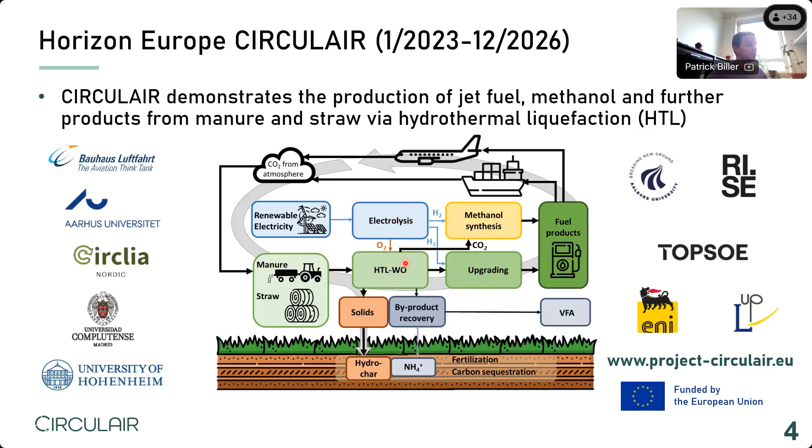This is where the wet oxidation process can use these 364 units of carbon, oxidize them, primarily producing heat, and also producing CO2 and some volatile fatty acids - this is all carbon-based. The concept involves utilizing the CO2 together with the CO2 from the HTL process to produce methanol. So the idea is a near-complete biomass utilization by using all of the side streams, and another aim is to increase this kerosene fraction to make jet fuel, with the ultimate goal of achieving carbon-negative jet fuel production by sequestering some of the solids underground and plugging all carbon losses so they are minimized.

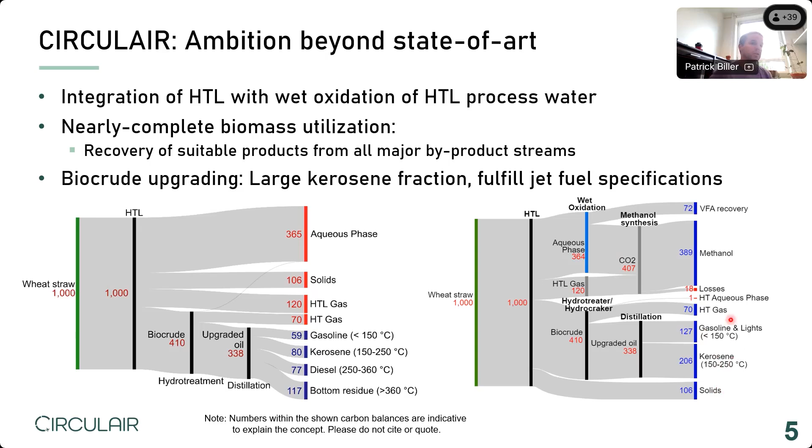So today's seminar is focused around the wet oxidation process. Briefly, this is a relatively old technology used for cleaning high COD wastewater, where the concept is essentially: you have a feed pump pumping your wastewater, combining it with compressed air, heating it up in a heat exchanger, and then the oxidation takes place between the organics and the oxidant.

This is an exothermic process, creating more heat. After the oxidation, it's cooled down, the pressure is released, and you separate your treated water from the off gas. Conceptually, you have your organics in the wastewater, and they are oxidized to CO2 and water.

Additionally, there is an intermediate product often formed, which is acetic acid, which can also be oxidized to CO2 and water, but it requires quite harsh conditions. So this is often found as an intermediate product. This is the wet oxidation process.

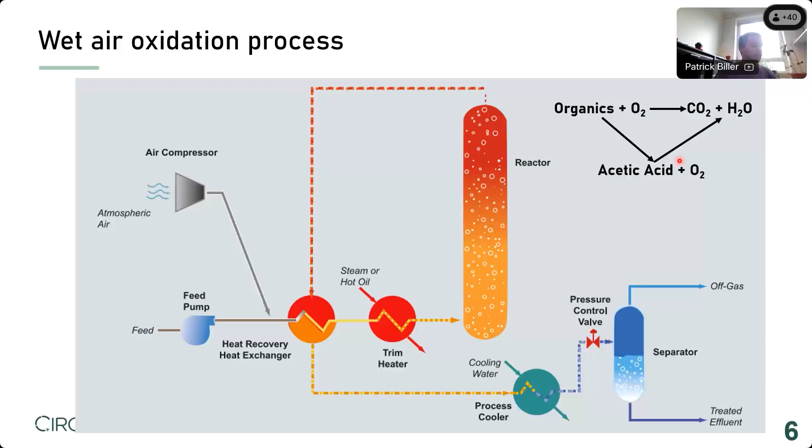And the idea of HTL wet oxidation integration, I'm going to try and explain here. It's all based on the fact that the wet oxidation process is exothermic and produces excess heat. The idea is that we can use this to provide the heat needed for the HTL.

On the left side of this diagram in green, you basically have a normal HTL process where you have a biomass slurry at ambient temperature. It's heated through a heat exchanger, which is heated by the HTL product, to around 280 degrees.

Then it would go into your HTL reactor, which we are operating at 325 degrees here. And then it'll be cooled down by heating the influent slurry. And then your HTL reaction is finished.

You would separate your biocrude oil, your CO2 gas, and your hydrochar in a separation here, leaving you with the dirty process water, very high in COD, which then goes into the wet oxidation process.

In the wet oxidation process, again, you have a heat exchanger to heat up your process water to around 280, 290. Then you add the oxidant, and this introduces this exothermic oxidation reaction, which will then increase the temperature of your process water to around 350.

This heat, this 350 degrees, can then be transferred by a heat exchanger between the wet oxidation side and the HTL side, meaning the HTL's 280 degrees can then be increased to the final HTL reaction temperature of 325. Typically you would have done this with a trim heater in a normal HTL reactor.

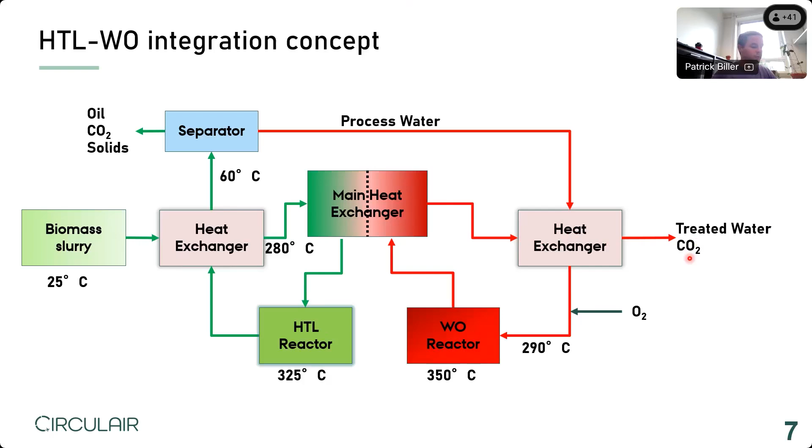First, we tried to model this process to see if it's theoretically possible to run autothermally, meaning providing all the heat for both processes from the exothermicity. First, we did a heat exchanger layout and a pinch point analysis to get an optimum heat exchanger network, shown here in this diagram.

Then we did an Aspen wet oxidation model to model the outlet wet oxidation and the amount of heat released from the oxidation of these organic compounds, based on the kinetics of known compounds found in literature. Finally, we did a MATLAB optimization code for the entire process integration, modeling all the temperatures at these different points in the diagram.

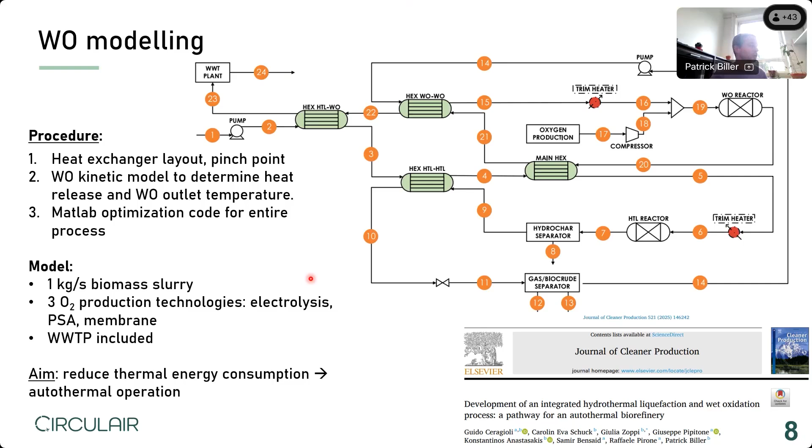The model assumed 1 kilogram per second biomass slurry input, so industrial scale. We used pure oxygen for this modeling, and included 3 different production technologies for oxygen: electrolysis, pressure swing adsorption, and membrane separation. We also included the energy required for treating the wastewater after either HTL standalone or HTL combined with wet oxidation. The aim was to find the optimal configuration to reduce overall energy consumption and achieve autothermal operation.

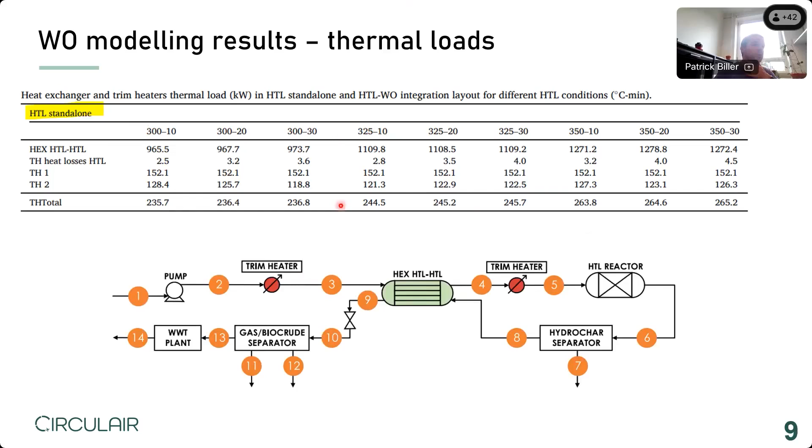So the modeling results: this here shows the HTL standalone system, where we modeled 3 different reaction temperatures and 3 different times—300, 325, and 350 degrees, with 10, 20, and 30 minutes of reaction time. You can see that the total energy consumption is between 230 and 260 kilowatts for this standalone system. Now I'm going to jump straight to the combined process.

Here we're performing HTL again at these different reaction temperatures and times, but the wet oxidation at 350. What you can see is that the trim heaters usually used to bring your reactants up to the reaction temperature in the wet oxidation reactor have an energy consumption of 0, meaning they are not needed at all. So all these top 4 lines are all heat exchangers—these duties, these kilowatts here, they're for free.

There's no electrical heat provided. The only heat we need to provide is for heat losses of the HTL reactor itself. So the total energy consumption drops from 235 kilowatts to around 2 kilowatts for heating only. This shows that autothermal operation is possible for the majority of combinations of HTL and wet oxidation, but not if HTL is run at the same temperature as wet oxidation, namely 350 degrees, because then there's no temperature difference to transfer the heat needed for the HTL reaction.

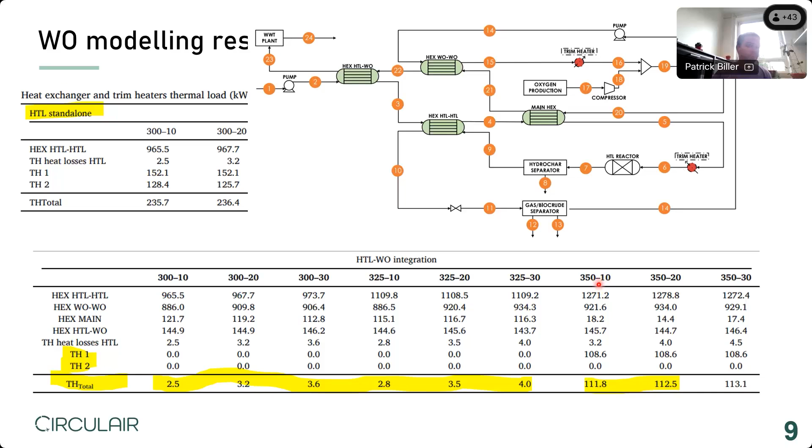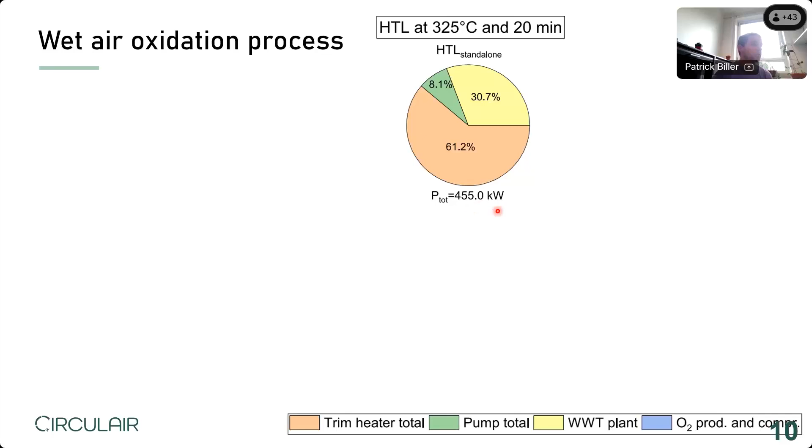The combined ones, you have 3 cakes because there are 3 different oxygen production technologies: pressure swing adsorption, electrolysis, and membrane separation to produce the oxygen. You can now see that the total energy consumption is around half. And now the majority of the cake is made up of this blue one, which is actually the energy consumption for the oxygen production and the oxygen compression. But the overall energy consumption is around half of that from the standalone process. So you can see that the oxygen production takes a lot of energy.

So you might think, why not just use air? And that is a very valid question.

On these different blue bars, for pressure swing adsorption, 15% of this blue area is for compression and the rest for production. These vary a little between the different production technologies. For example, electrolysis is quite energy intensive, so only 5% of this would be for compression and the rest for production, also because it comes out of the electrolyzer at elevated pressure. If you would use air, it would use about 65 kilowatts versus the 85 kilowatts used in pressure swing adsorption, so about a 20% reduction in this blue area. That is entirely a possibility worth thinking about, and we'll get to that in a minute.

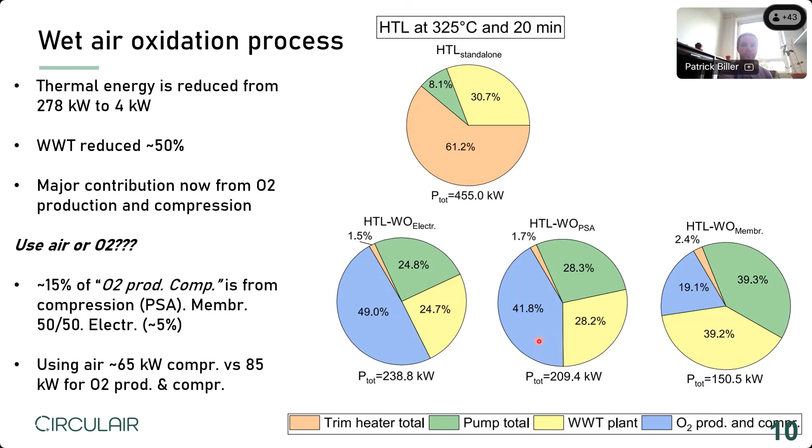But first, another energy comparison of these integrated and non-integrated processes is something called the energy return on investment. Here we compare the energy produced, which is the mass flow of biocrude times the heating value of the biocrude, to the energy needed for pumping, heating, and wastewater treatment. That gives you a ratio of how much energy is produced compared to how much is consumed in the process. The green ones here are for HTL standalone, meaning you produce around 3 units of energy for every unit of energy invested in running the process. So that is fairly okay.

And if we look at the energy return on investment of the combined process, you can see that we have to add the oxygen production and compression costs to this, as well as additional pumping for the wet oxidation process. But regardless, you can see the numbers increase quite significantly compared to the standalone, because we've saved so much on the heating despite the additional energy for compression and oxygen production. You can also see that it makes a huge difference which oxygen production technology we use.

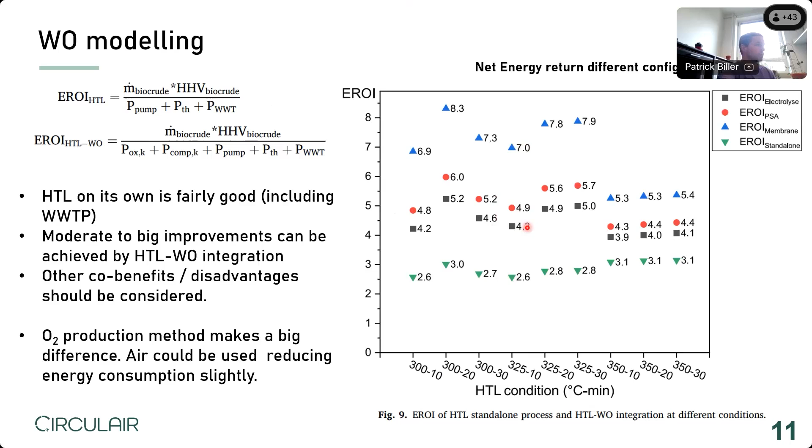And again, you could ask, should we be using air versus oxygen? This is something I'm going to talk about in the next couple of slides. We did an additional study on a continuous system where we tried to mimic pure oxygen by providing hydrogen peroxide, which then decomposes to oxygen and water, simulating pure oxygen addition.

You have to consider that air is a lot of nitrogen, so when you're compressing it, you have to compress a much larger volume compared to pure oxygen. This is the disadvantage for sure, but you don't have the production cost disadvantage of pure oxygen.

And then there's also the question of the solubility of nitrogen. Basically, oxygen and CO2 solubility at wet oxidation conditions are complex, but quite high, almost complete compared to nitrogen, which will make a separate gas phase on top of your water phase or mix in between your water phase. This can mean that the equilibrium between vapor and liquid will change, meaning more water will evaporate, which will consume energy, lowering the heat release of your system. So there, the nitrogen is a big disadvantage.

An advantage of using pure oxygen is that you actually have slightly higher COD removal than using the air equivalent, as you can see in this figure where we tested air versus H2O2.

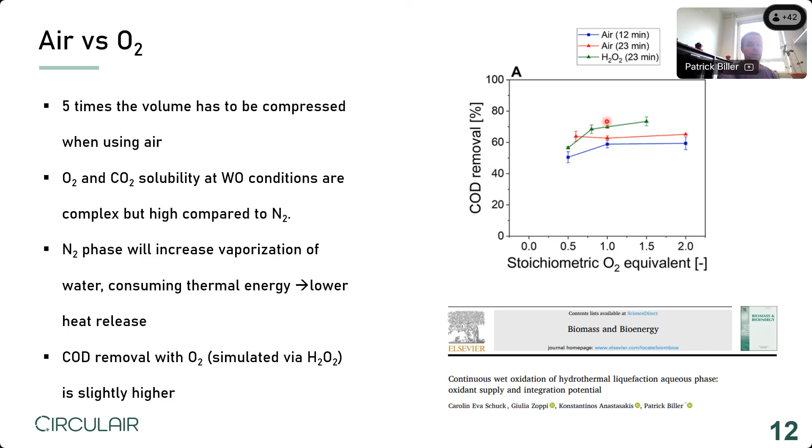In terms of the other experimental parameters that are important, for nitrogen, we aim to recover it as ammonium after the wet oxidation process. These first two figures show results with air, and the final one with hydrogen peroxide simulating oxygen. You can see that the blue ammonium selectivity in the residual nitrogen drops from 80 to around 60%, meaning oxygen is disadvantageous for this.

We don't know quite why.

Another interesting result is the recovery of acetic acid in the post-wet oxidation water, and here we don't see a difference between air and hydrogen peroxide.

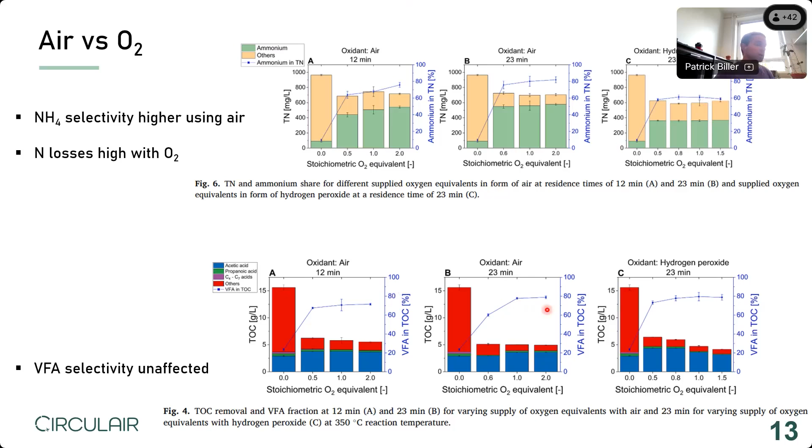Going back to this diagram of CO2 recovery - since we're producing a lot of CO2, sequestration could be quite interesting to evaluate. We know that the HTL gas is around 95% CO2.

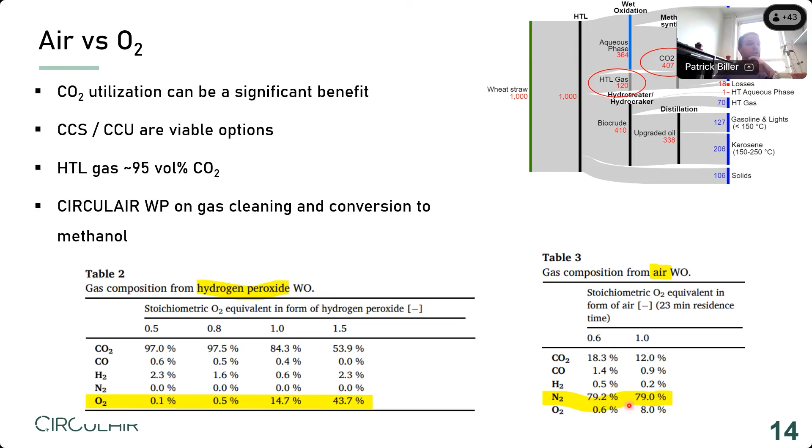These two tables compare hydrogen peroxide simulating oxygen versus air. If we provide substoichiometric amounts of oxygen, we end up with 97% CO2 and hardly any unconsumed oxygen. If we do the same with air, we end up with only 18% CO2 and a lot of nitrogen from the air, so pure oxygen is advantageous.

To summarize the experimental results: COD removal is a function of time and temperature, typically reaching around 80% under realistic process conditions. Ammonium is also converted quite efficiently, reaching about 80% selectivity, and VFA is also around 80% selectivity with high acetic acid. If we run substoichiometric oxygen supply, we can reach 97% CO2.

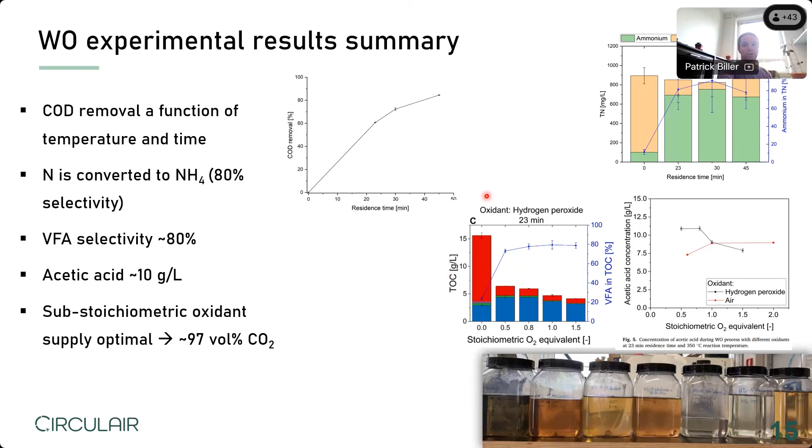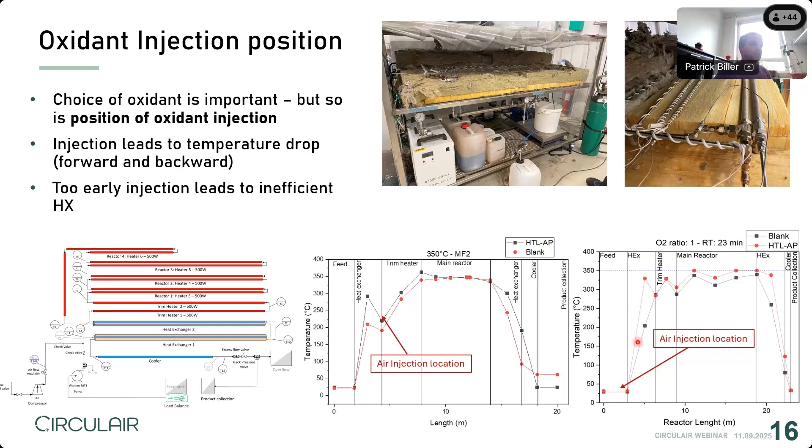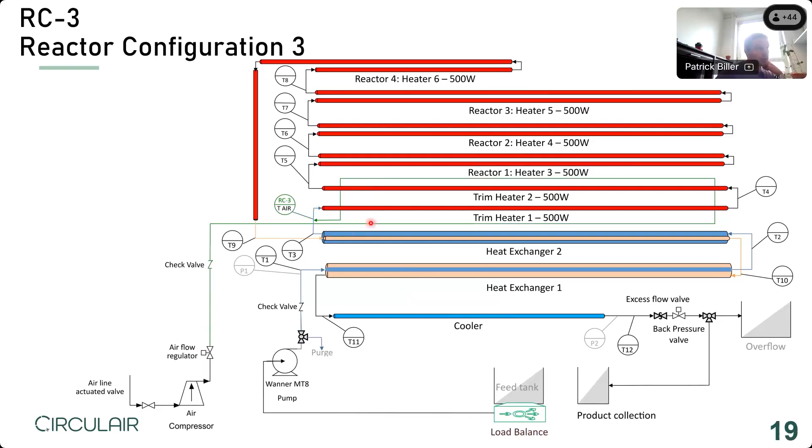We investigated this in more detail by changing the air injection location from before the heat exchanger to after it. We also tried preheating the air by laying the air pipe on the trim heater. We also tried adding check valves because we noticed the air was going backwards in the reactor, reducing the temperature backwards.

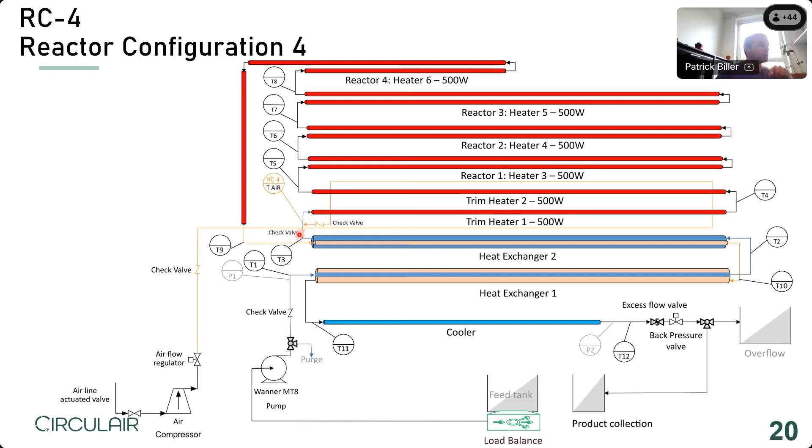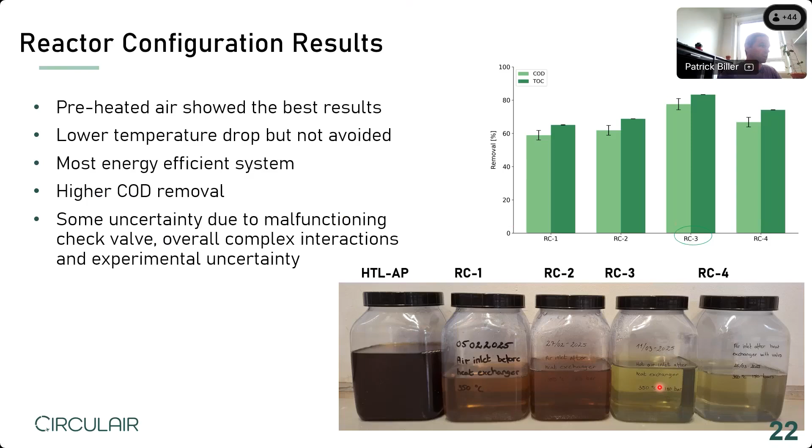Long story short, the best result we found was with preheated air, which actually had a positive effect. This is a complex system with some experimental uncertainty, but you could definitely see a difference. This is something we'll be investigating further in technical implementation on our new demonstration integrated reactor - I'll get to that in the next couple of slides.

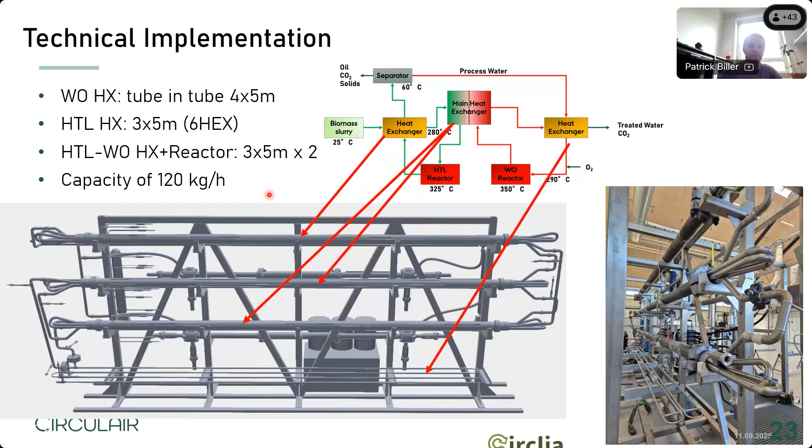On top we have a heat exchanger for only HTL, and then we have 2 heat exchangers in the middle, which exchange heat between HTL on one side and wet oxidation on the other. The whole system has a capacity of around 120 kilos of slurry an hour, the equivalent on the wet oxidation side. This is the picture of these heat exchangers.

So you'd have a hot and a cold, and a hot and a cold, and a hot and a cold. In the top one it would only be HTL - just hot HTL, cold HTL. In the other two, you have HTL in 3 pipes and wet oxidation in 3 pipes, transferring heat from the HTL to the wet oxidation. We also have the option of adding heating to these so that we can run HTL and wet oxidation independently without each other.

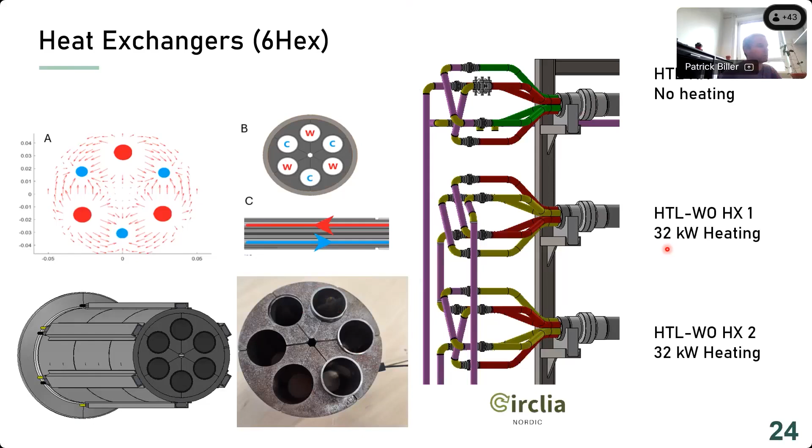And then the final thing is on air injection or oxygen injection. We've added some options so we can pump H2O2 solutions into the reactor. We have gas boosters to provide compressed air, and then we can measure all of this. This is a bit too much detail, but essentially we have 2 different locations where we can add the oxidant to optimize this and avoid these effects, also with preheated air and oxygen.

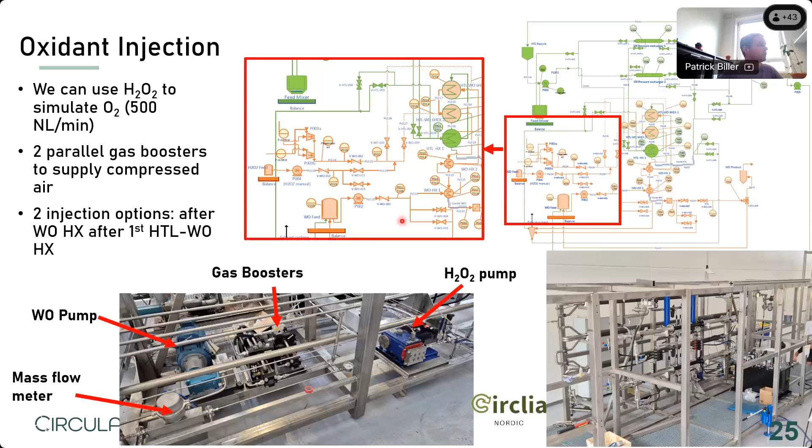So to summarize, autothermal HTL wet oxidation integration is definitely theoretically possible. As the modeling has showed, it's actually quite easy in terms of how much heat is produced. In addition, it has added benefits by reducing COD by about 80%. Ammonia, VFA, and CO2 are produced, which are interesting for downstream recovery and utilization.

But you have a penalty of increased capex, because essentially you need 2 reactors and more compressors and things like this. Overall, the HTL wet oxidation energy consumption is around half compared to that of an HTL standalone system. The compression costs are significant, around 60% of the HTL wet oxidation system, while it's 90% heating for the standalone.

Oxygen is superior in terms of various aspects, but supply costs need to be considered, so it can be quite costly. The optimal injection of the oxidant is something that is quite tricky, and we need to be working on it in the coming months. So the implementation, you saw some pictures of the combined reactor, is close to being finalized, but the demonstration of the autothermal operation is still outstanding.

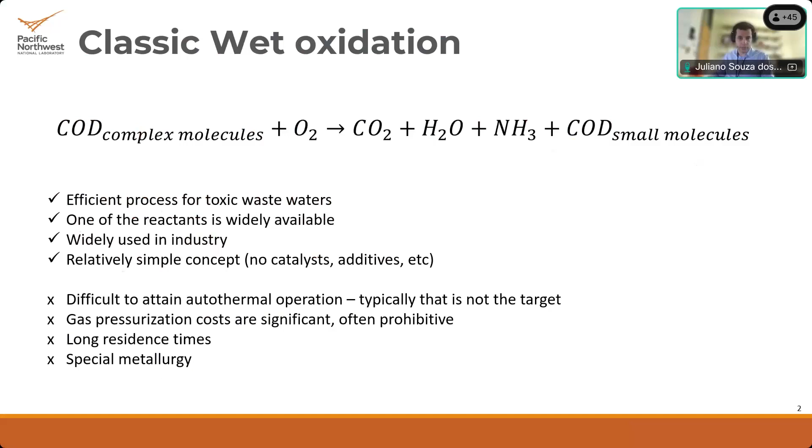So now let's talk about the properties of the reactor, starting with temperature and pressure.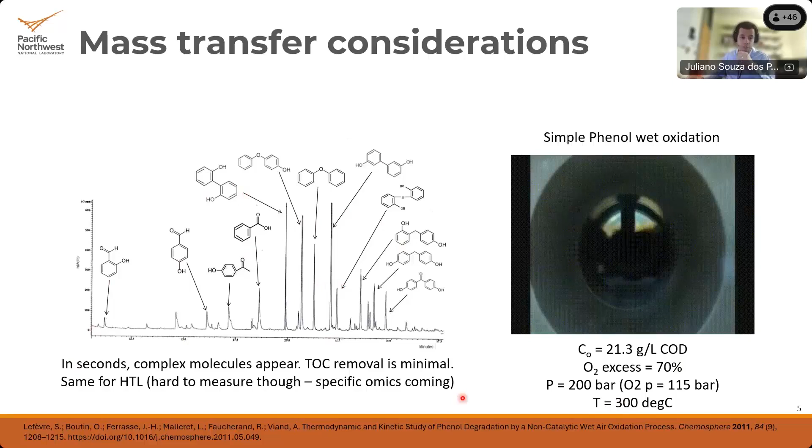Using this type of stirrer, it's possible to deliver oxygen in a very reliable way in the liquid phase. So if you're in a stirred tank, this type of stirrer gets the oxygen from the headspace and delivers it all the way into the liquid, which is very interesting, but still you have this type of behavior.

In our measurements for hydrothermal liquefaction waters, it's hard to see because these waters are already very complex. It's very difficult for us to measure, but we are doing some omics measurements, HRMS measurements, to try to understand this type of behavior under hydrothermal liquefaction aqueous phase wet oxidation.

Talking about air versus pure oxygen, as Patrick was saying, I want to add a bit more. With air, you're working with larger gas to liquid ratios; with oxygen, smaller gas to liquid ratios but higher oxygen concentration, meaning your partial pressure is higher with a smaller volume of gas.

Second point: high nitrogen volumes need pressurization with air, but with oxygen, a full separation production unit is required. Air may operate with excess gas in a gas-liquid system, while oxygen requires careful gas dispersion in a liquid-gas system. This is a very important point to consider when implementing wet oxidation.

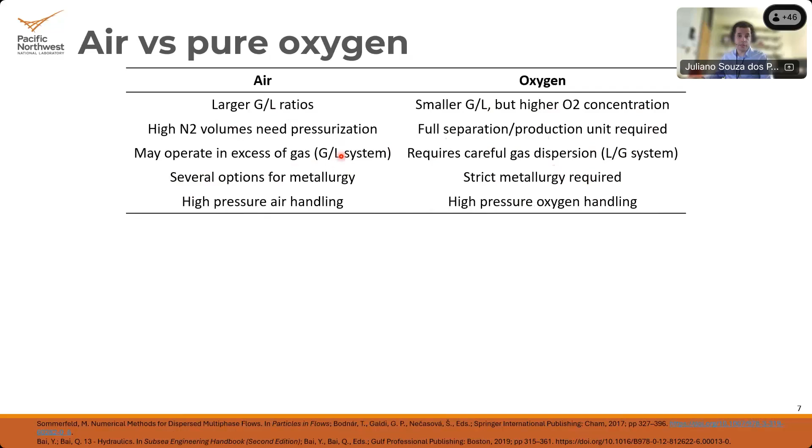And even that is very difficult to actually measure and investigate, because simulations at these conditions are very hard to make.

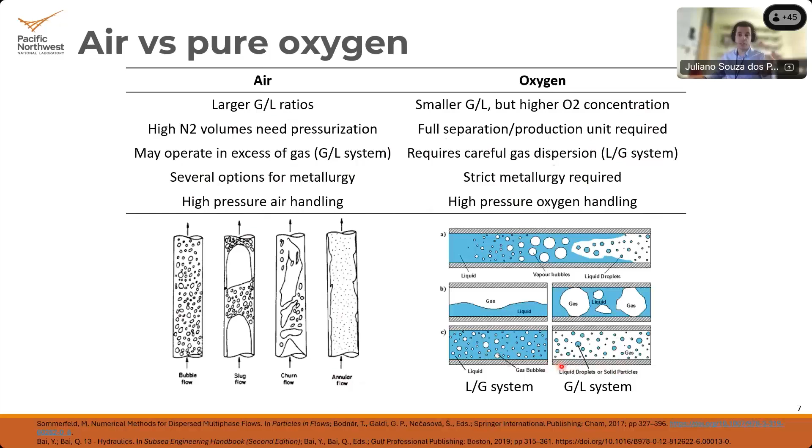So, reactor design examples on the left side: this is the typical wet oxidation process, called the ZIMPRO process, deployed in several places. Basically, you have polluted water, a feed pump, you go into a heat exchanger, into a sort of trim heater, and then into a reactor—typically a tower reactor. You have a big tower with oxygen dispersion at the bottom, and the reaction happens upflow. Then you go into the heat exchanger again to recover heat and into a depressurization stage, and finally separate your gases and liquids.

Residence times in the reactor piece, 60 to 90 minutes is the typical thing. Temperature is 200 to 250 degrees, as I was talking about commercial processes.

On the right side here, it's a process that was also deployed in several places, but the ZIMPRO process is definitely more used. The wet ox process on the right side here is basically a feeding pump, heat exchanger, same as before, and then you go into a sequence of CSTRs. For everyone that's a chemical engineer here in the meeting, we already know where this is going: a sequence of CSTRs is basically a plug flow reactor. That's a way of doing it, with the advantage that you can increase your mass transfer coefficients by having stirring in each section in this pressurized vessel.

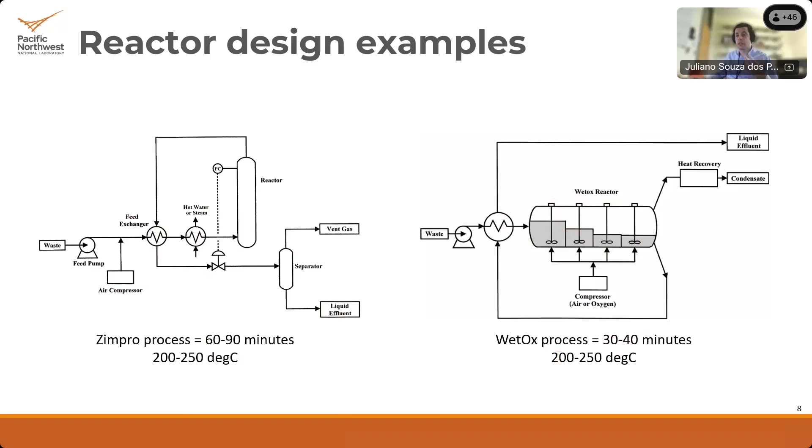The most difficult part of this process is that you actually have to put the mixer inside. So your couplings on the top part tend to be quite problematic to handle, and the reliability is a little lower. But your residence times can be cut in half as compared to the Zimpro process. So mass transfer coefficient is much higher on the wet ox. Zimpro process is widely used because it targets an autothermal operation.

Now talking about our results in vertical reactors, we just published this a month ago or so. The results are quite similar to the ones from Aarhus University. We have residence times from testing from 0.2 hours, so from minutes, all the way to 60, 75 minutes of residence time inside the reactors, and we get conversions as shown here.

On the black dots here, you have the COD reduction, and we achieve very large COD reductions on the left side for the residence time, and on the right side we test different temperatures with long residence times—70 minutes or so—as compared to the different residence times on the left. So basically, we attain very large conversions, but the residence time has to be very large, and the higher the temperature, the better the conversion as well, of course.

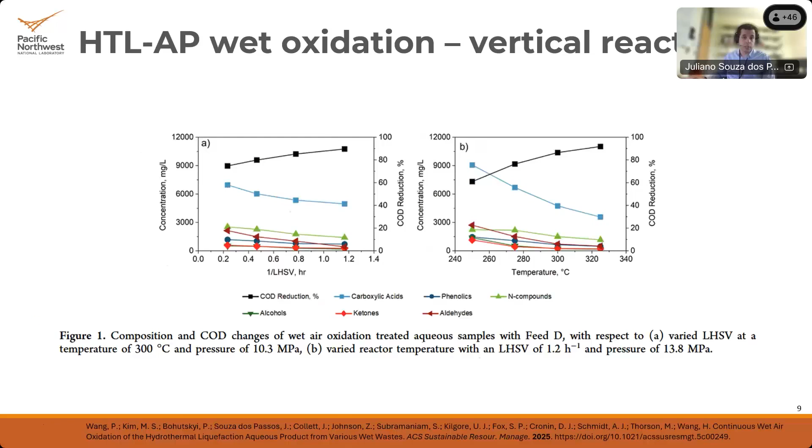Looking at the compounds and which ones are actually formed, it seems to be more or less constant for quite a lot of compounds as you increase your COD reduction, so the more stringent your conditions are. Then when you get to the last 25-30% of the COD reduction, you start to consume the compounds that are still there. That's the case for the groups on the left, and for specific compounds on the right. Some compounds actually increase in concentration, but then they start decreasing again around 30% missing of the COD at the end—you start to actually consume them as well.

So what condition of flow are we in, in the vertical reactor we were talking about? The ideal thing would be that we are in a bubble flow condition, but we are not. Our best estimate is that we are in a slug flow, meaning a bubble of gas moving through the liquid, with quite a bit of backflow. So the residence time distribution doesn't look good for this type of reaction setup, but it's useful for us to understand the reactions and the products formed using this type of apparatus.

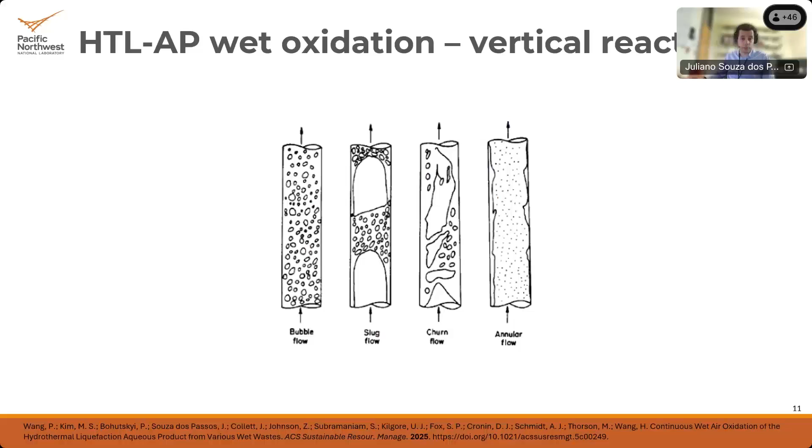Over here, we try to actually measure—because we saw in the continuous flow reactor there were some limitations for our understanding—we try to replicate the experiments in batch conditions, and then try to estimate the kinetics of wet oxidation and get into the proper chemical kinetics measurement.

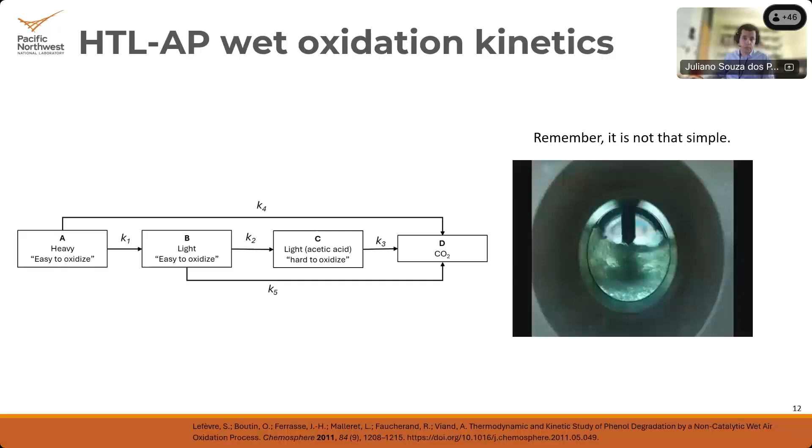But remember, it's not that simple, as I showed in the other paper, that there is a complex reaction formation of sort of soot formation in the beginning of the reaction. But even with this, we try to estimate the kinetics, and we managed to do a very good job using this scheme: heavy compounds, which we call easy to oxidize, can go either directly to CO2, or go through steps of light compounds, B and C, into CO2, or from the easy to oxidize light compounds to hard to oxidize, which was basically acetic acid. Then we tried to match all the concentrations we had with different compounds measured via HPLC and GCMS, bulking everything together in the same model to try to predict these conditions.

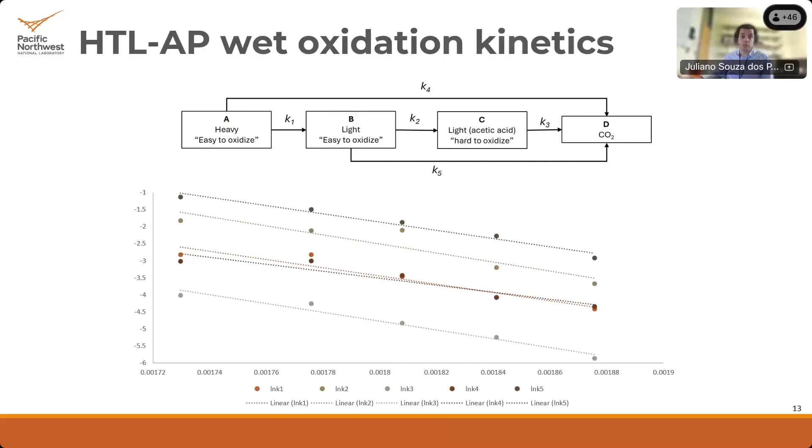The kinetics here in the bottom looks pretty good, so we started to compare with the results that we have experimentally. We have here in the first graphs from 260 to 290 degrees Celsius, and the blue lines here are basically the D, which is CO2. So if you look at the blue line, you're more or less looking at the COD reduction.

This is CO2 concentration at the end of the process, and you can see it's a pretty good match for all of the compounds that we've measured, all the way to 290 degrees.

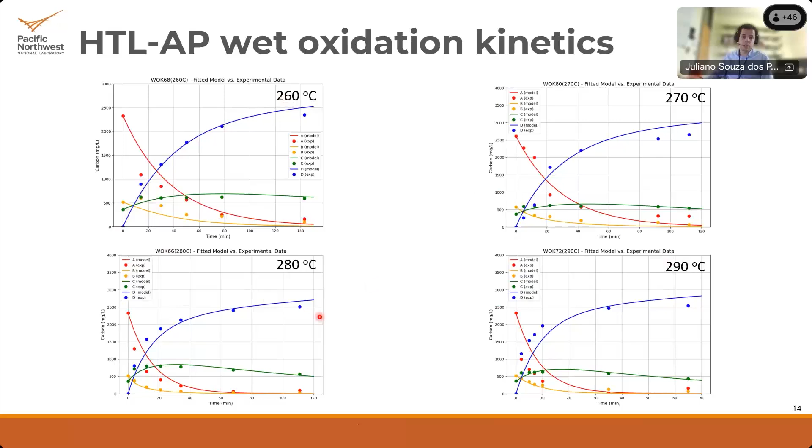But when we go a little further in temperature, to 305 degrees, 325, and we also have more measurements at 350 and 360 degrees that I didn't include here, basically the kinetics starts not to work. So there's a change. The basic conclusion is that after 300 degrees Celsius, there's a kinetic regime change, and the main question that pops to mind is: are we really measuring the chemical kinetics?

We are still trying to figure that out, to make sure that we are measuring the chemical kinetics and not just a mass transfer limited process.

If we compare the residence times we're talking about—30, 60, 90 minutes for wet oxidation—with supercritical conditions, which is another whole process: supercritical wet oxidation exists as a technology, and you assume it's a single phase. In that process, they use seconds to below 2 minutes of residence time to attain more than 95% COD removal. It brings its own set of disadvantages that I'm not going to go through here, but being supercritical eliminates this type of mass transfer limitation we're talking about in wet oxidation.

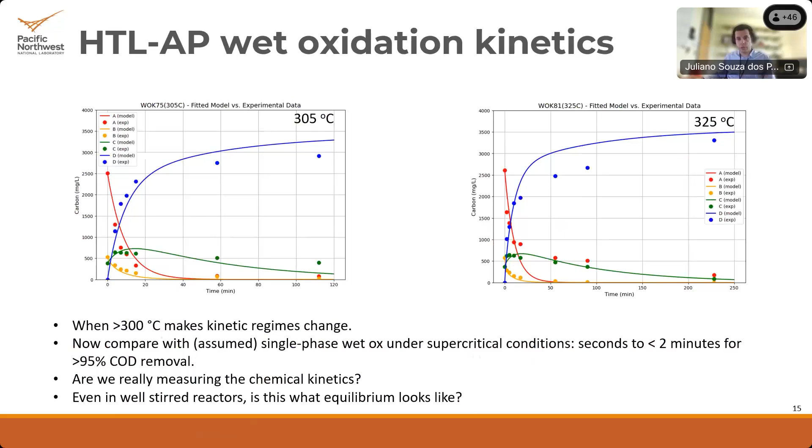And even in well-stirred reactors, is this what the equilibrium looks like? Is this really the chemical kinetics, or are we always trying to measure something that is limited by the mass transfer side and solubility side of oxygen? Well, in general, wet oxidation...

So the conclusion is basically making sure that we are measuring the chemical kinetics, and if we're not, that's fine as well, as long as we can actually split K, L, and A—the mass transfer coefficient and the area where this mass transfer happens. At high pressures on site of a hydrothermal liquefaction plant, high pressure gas handling will increase complexity in operations. So to reduce the capex of the overall concept, it's very important for us to reduce the residence times used in the wet oxidation plant to make the process itself more economical.